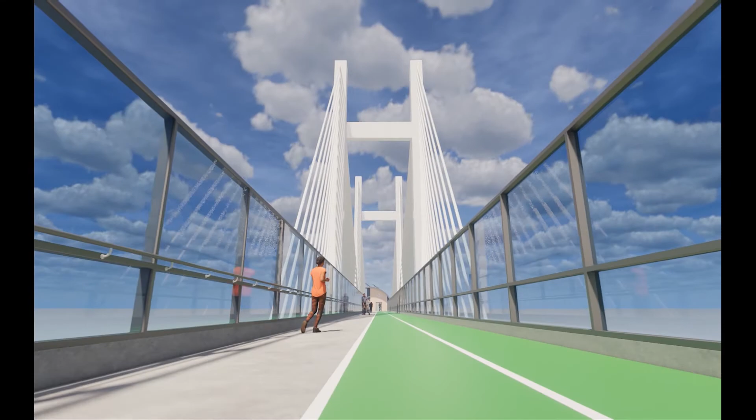Welcome to our video presentation. We are Atlas Civil Engineering, a design team commissioned by the City of La Mesa to develop a pedestrian bridge connecting Parkway Drive and the 70th Street trolley station.

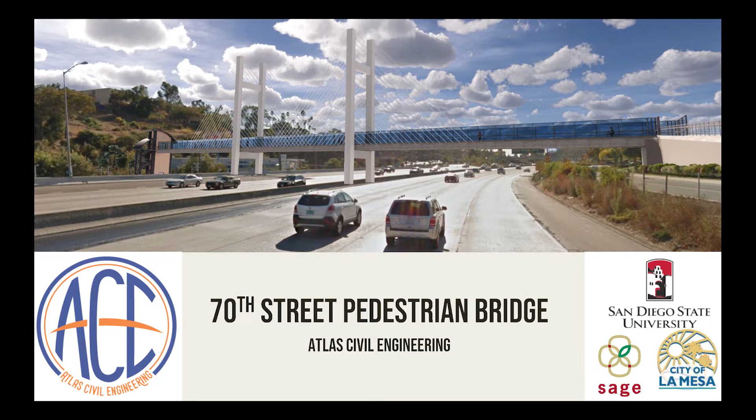Hi, I'm Rose. I'm a fifth-year civil engineering major, and I was the lead CAD and structural personnel for this project. My name is Valeria Contreras, and I'm a graduating senior. I was in charge of geotechnical analysis and foundation design. My name is John Taylor. I'm one of 3 structural engineers on the project.

Hi, my name is Hannah Rebello. I'm a civil engineering major in my senior year, and I did the traffic impact analysis and traffic station plans for the 70th Street pedestrian bridge. My name is Christopherson Garcia, and I worked on the hydrology and construction portion of this project. And I'm Jennifer Womeyer. I was the project manager for our team, as well as both the stormwater and environmental engineer for this project.

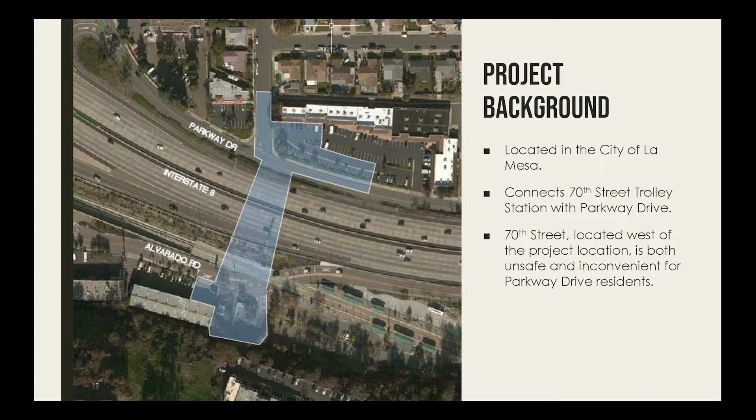This project is located in the City of La Mesa, a community with 60,000 residents located in the heart of San Diego County. It connects the 70th Street trolley station, located on Alvarado Road, with Parkway Drive across to Interstate 8. This community along Parkway Drive has the potential to use transit, but due to unsafe and inconvenient road conditions along 70th Street, they avoid using this station.

The City of La Mesa is moving forward with becoming more sustainable and pedestrian friendly, which has necessitated the building of a pedestrian bridge that will serve as a gateway to the city.

Building the bridge presented 2 major qualifications: fitting in with the city's climate action plan, and presenting pedestrians with a safer and more convenient path to travel than what's currently available.

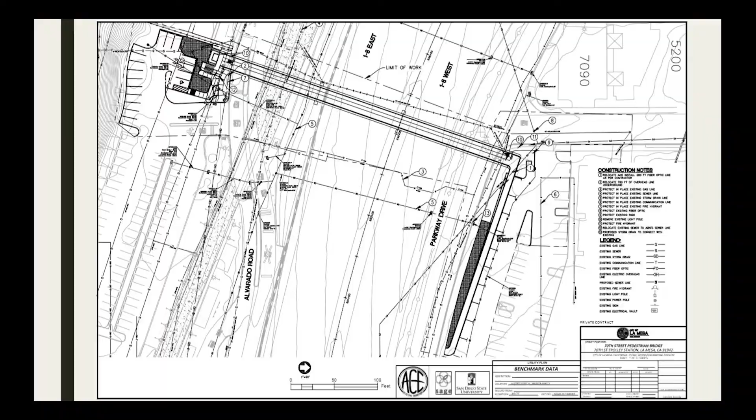There are several existing conditions we had to take into account when designing the bridge, including the freeway, the trolley station, utilities above and below ground, and the public and private land we had to either consider or acquire for the bridge. There are 3 major utility considerations we had to make.

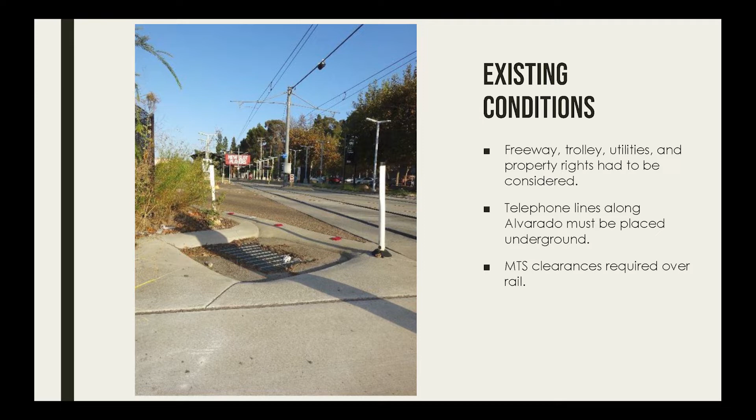First, the telephone wires, which we'll have to bury. Second, the trolley itself, which you have to build far enough above and far enough away to clear the tracks. The last one is the gas line that runs under the street, which must be avoided at all costs.

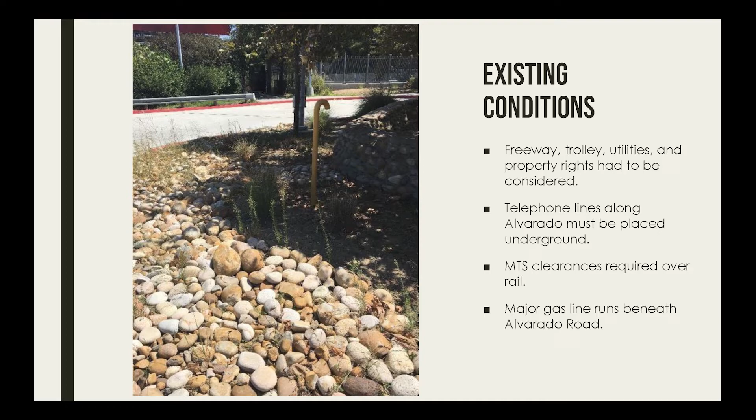We designed a cable-stay bridge in order to reduce the amount of load and also in consideration of construction over the I-8, while maintaining the requirement as a gateway bridge for the City of La Mesa.

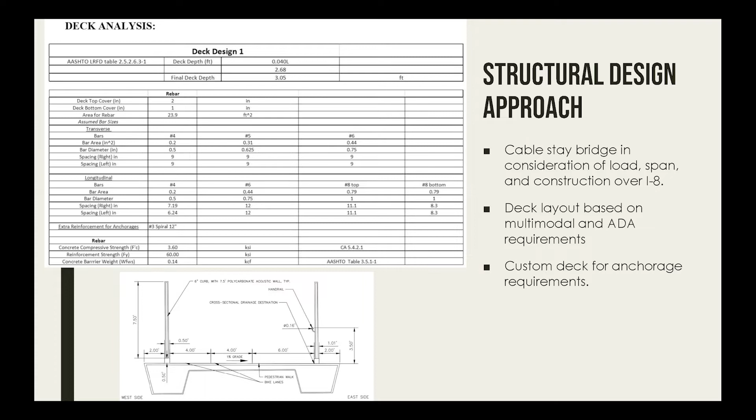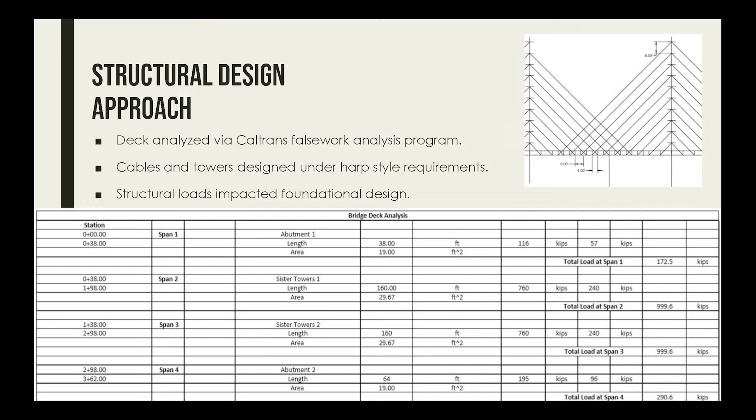The cables for the bridge were designed under harp-style requirements, with the towers accommodating a higher volume than the deck in question. We also incorporated 2 different decks in order to reduce load being supported by our foundation, also shown here.

The design consideration for the foundation of the bridge was based on the total load of the deck and the tension in each of the cables.

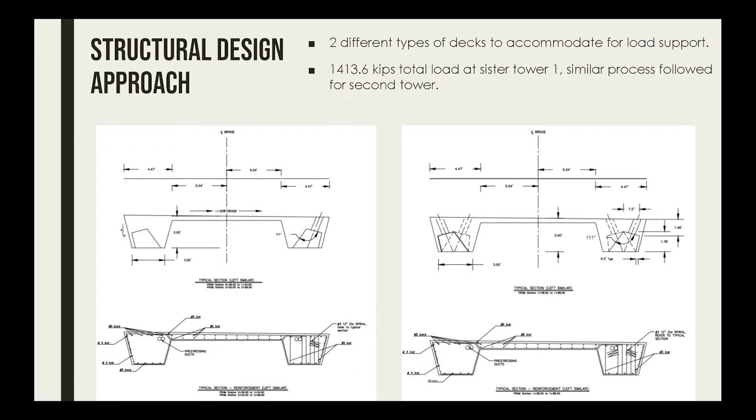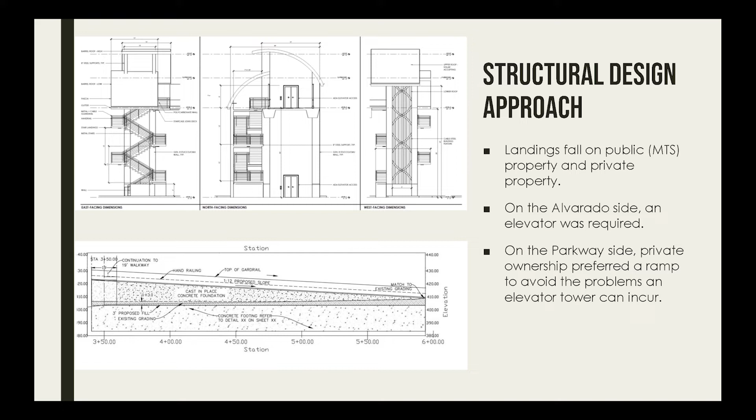The ends of the bridge land on 2 different kinds of property: one side public, the other private. On the public side, we built an elevator due to space constraints and vertical clearance. On the other side, we built a ramp, because an elevator would be seen as an eyesore while a ramp is more aesthetically pleasing.

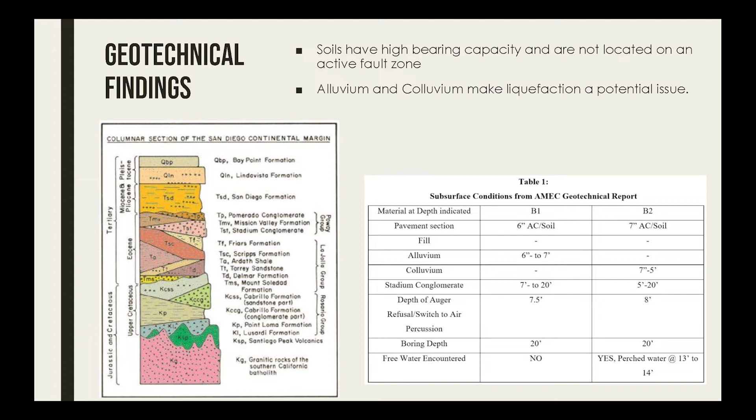The stadium conglomerate layer is suitable for foundation design since it has a high bearing capacity. The project location is not on an active fault zone, therefore critical seismic activity will not affect our structural design. Liquefaction could be a potential factor since alluvium and colluvium are categorized as loose sandy soils. Erosion could not be a problem since horizontal construction is mainly at ground level.

Based on our soil analysis, we recommend cast-in-place concrete piles that reach the stadium conglomerate layer and account for the high load of the superstructure. Pile design is based on the beta method for determination of ultimate bearing capacity for drained soils.

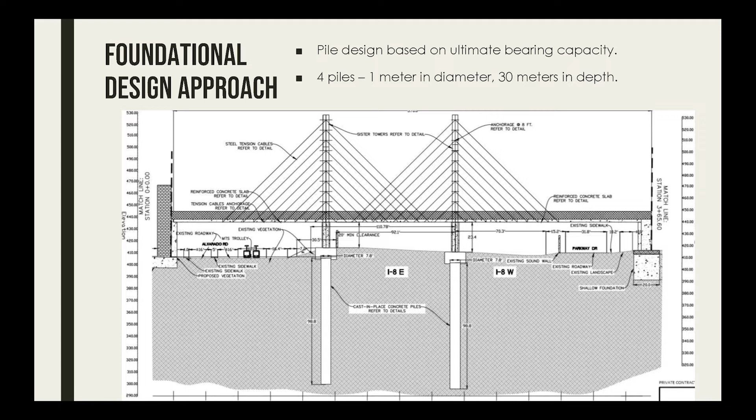Our analysis resulted in the selection of 4 piles of 1 meter in diameter and 30 meters in depth, with a factor of safety of 2.6. Foundation further up on Parkway Drive uses a shallow foundation design. We calculated 6 meters in depth and 6 meters in width, with a factor of safety equal to 2.

The need for a pedestrian bridge to address the unsafe existing pedestrian conditions near the 70th Street trolley station was central to the initial site layout and alignment of our bridge design. The lack of safe pedestrian facilities in the area to convey walkers and bikers to the MTS trolley station, paired with the City of La Mesa's initiative to increase active transportation, drove our design and indicated the need for a pedestrian bridge connecting Parkway Drive to Alvarado Road.

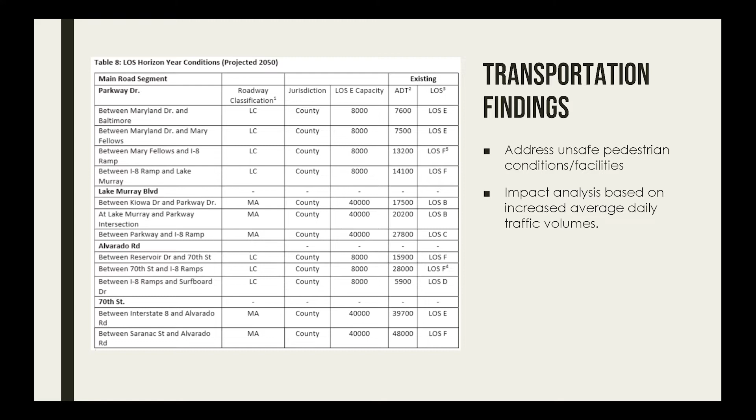The impact analysis of the structure was based on the increased average daily traffic volumes in the area. For example, Lake Murray Boulevard, Alvarado Road, and 70th Street, as estimated by the 2050 projected data from the SANDAG Transportation Information Center, showed dramatic decrease in LOS as traffic volumes increased in the future. The impact of the bridge has potential to reduce traffic volumes as it would encourage drivers to use public transit.

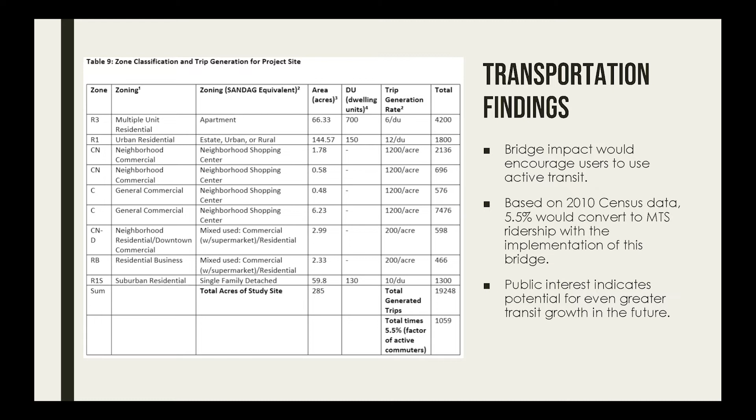Other implications for design were the pedestrians it would impact in the City of La Mesa. Based on the City of La Mesa zoning and the SANDAG not-so-brief guide of vehicular traffic generation rates, the total number of vehicular trips were calculated for the study site just north of Parkway Drive. This number, when multiplied by the 5.5% of the City of La Mesa that would walk, bike, or use public transit from the 2010 census data provided by SANDAG, showed a reduction of over 1,000 trips, as this percentage has the potential to use the bridge and public transit to transport themselves.

Further, based on the La Mesa Urban Trails Mobility Action Plan, 84% of survey participants in the City of La Mesa strongly agreed that trolley stations or bus stops should be within 10 to 15-minute walks or bike rides, which shows the public interest in the use of public transit.

From design, the maximum reduction in travel time was 12 minutes with a distance reduction of 0.5 miles. This reduction in travel time, as well as the proposed pedestrian facilities, fits into the climate action plan put out by the City of La Mesa and provides a safe route for residents to use public transit and to actively transport themselves.

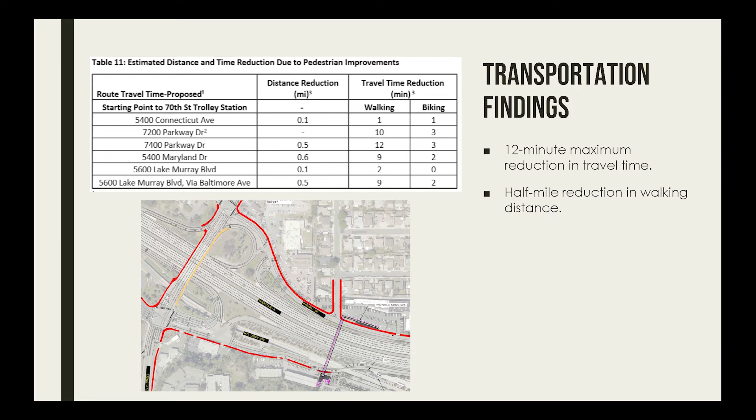Based on these transportation findings, an estimated 1,025 cars will be taken off the road each day as commuter vehicles. Because fewer cars would be on the road, the city will see a large decrease in GHG, and about 5,800 metric tons of carbon dioxide will be removed from the air each year, contributing to 35% of the total La Mesa Climate Action Plan goal target for 2020.

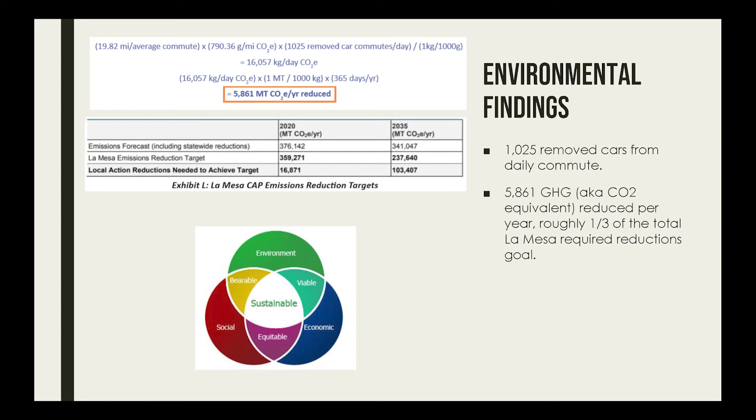The methods taken for the hydrologic analysis of this project follow the County of San Diego's hydrology manual. This analysis followed the rational method, where the equation Q equals CIA was utilized to calculate discharges. Discharges for our 100-year, 10-year, and 2-year storms for the existing and proposed landscapes were found. The findings showed that the project would not be affected by the current hydrologic landscape in the area. This is due to the stormwater runoff that is shedding away from the proposed alignment on the Parkway and Alvarado side of the bridge.

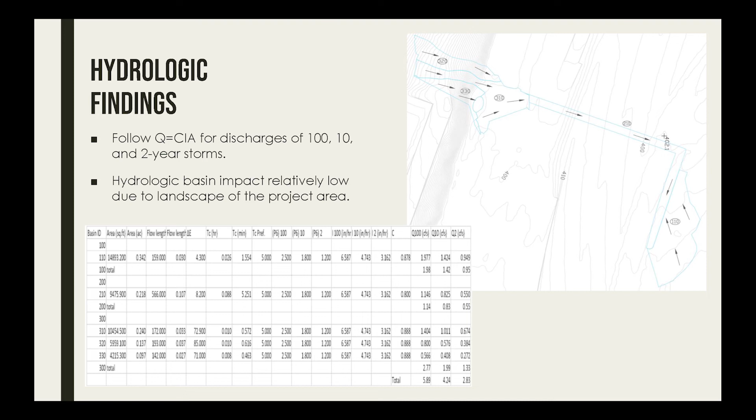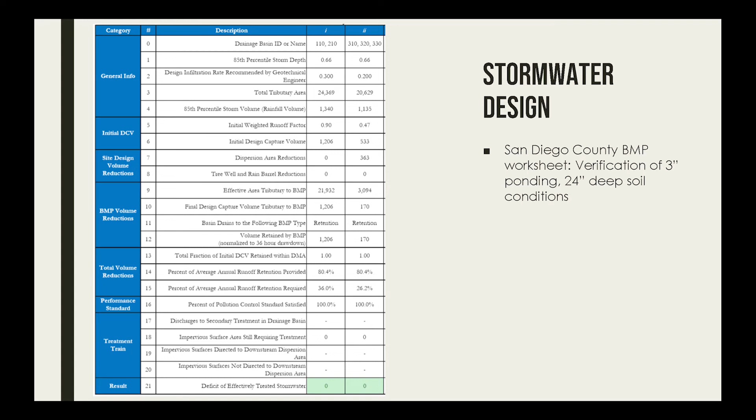Our stormwater analysis found it necessary to treat all water that fell into our project site. By consulting the San Diego County BMP worksheet, we found that the introduction of bioretention basins on both the north and south sides of the bridge were ideal. Creating a ponding depth of 3 inches and a soil matrix depth of 2 feet provided more than adequate treatment for the stormwater predictions of our hydrologic findings while allowing room for plant growth.

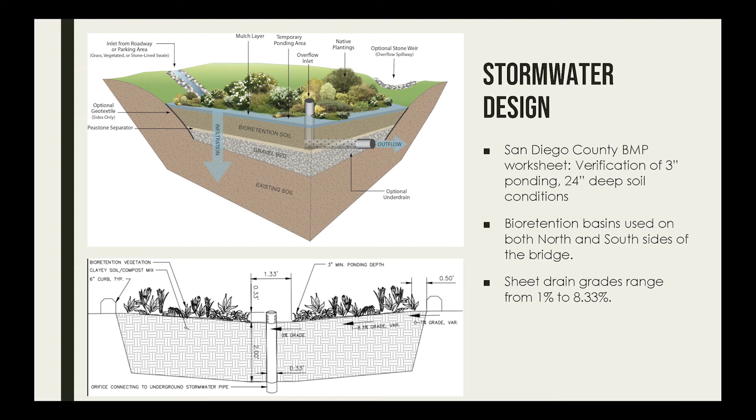We devised the bridge to sheet drain at gradual slopes ranging from 1% to 8.33% to eliminate pooling while remaining ADA compliant.

The construction methodology for the project consisted of breaking the project into several different phases, which begins with construction of the elevator tower and ramp as phase 1 and 2, with the structures being cast in place. For phase 3 and 4, construction for the sister tower begins, starting with the tower within the I-8 median for phase 3.

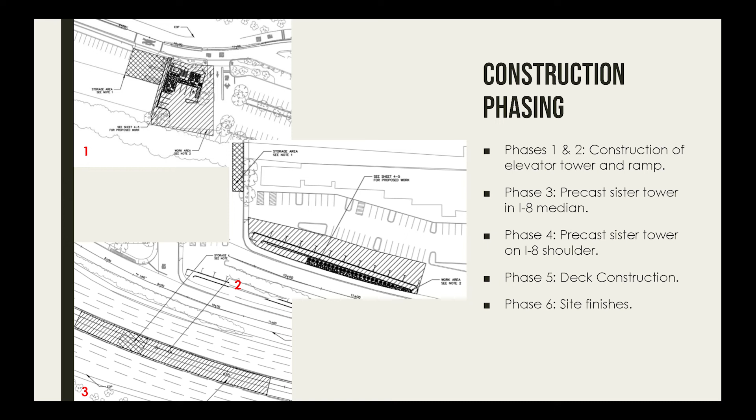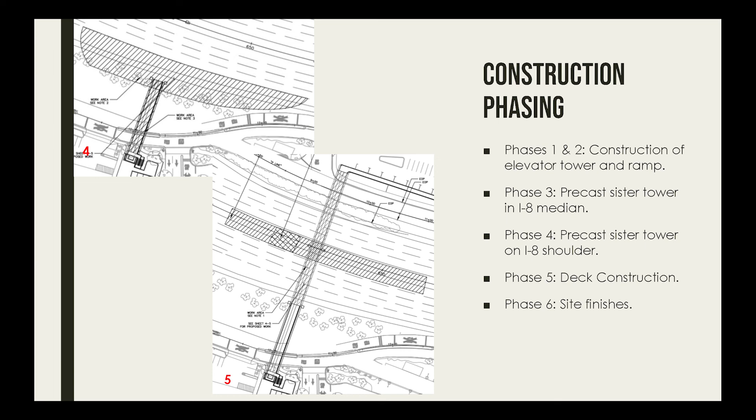The tower and the piles will be precast and spliced. Then we move on to Phase 4, the tower being constructed on the dirt area adjacent to the eastbound shoulder of the I-8. Phase 5 will consist of the deck construction, where the precast splices will be placed and the strands tensioned on site. After the completion of the deck, construction for the bioswales, lights, elevators, and other site finishes can begin, leading to the end of construction.

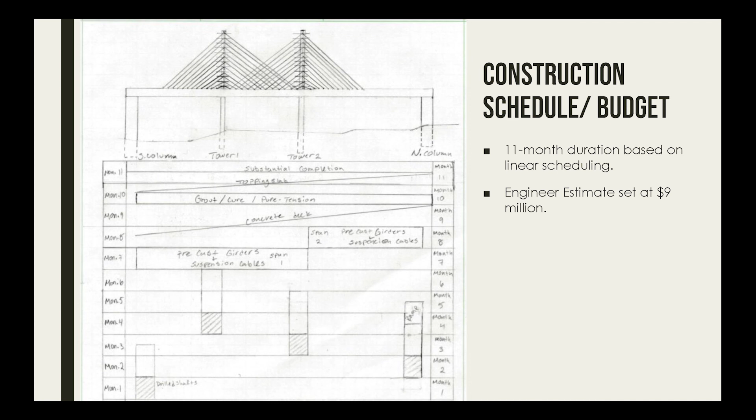The duration for this project was determined to be 11 months, shown in the linear schedule. Also, the engineer estimate totaled the project at approximately $9 million.

Based on our findings and results, we conclude that if built to specification, this bridge will have a positive impact on the community and the environment of the City of La Mesa. Once built, convenient and safe trolley access will promote MTS ridership by allowing citizens a feasible alternative to car commuting. This will improve both GHG emissions and traffic conditions in the area. The 70th Street Pedestrian Bridge is a perfect fit for the La Mesa community and would stand to represent the ambitions of the people of La Mesa.